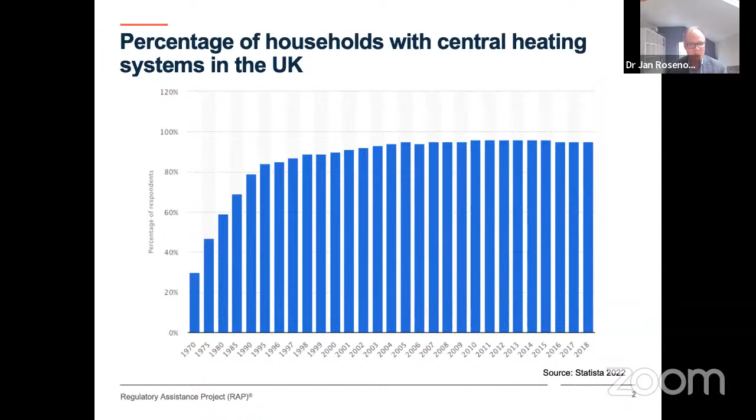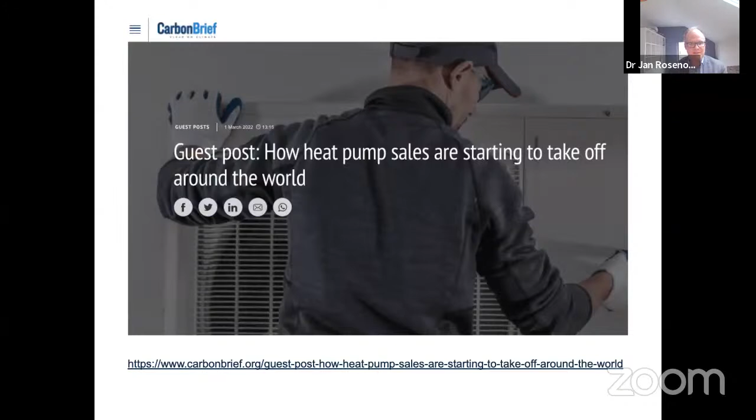Let me now go to the first of the three topics I wanted to talk about. Actually, there's a bit of an introduction about the global heat pump market developments we've recently seen before I come to that. This is based on analysis I've done for Carbon Brief recently with Duncan Gibb from REN21. We looked at the most recent data on market developments for heat pumps all over the world and selected a number of countries. This is the post - you can see it online if you want to look it up and find all the data and sources. The key finding really is that over the last decade, heat pumps have grown quite a bit.

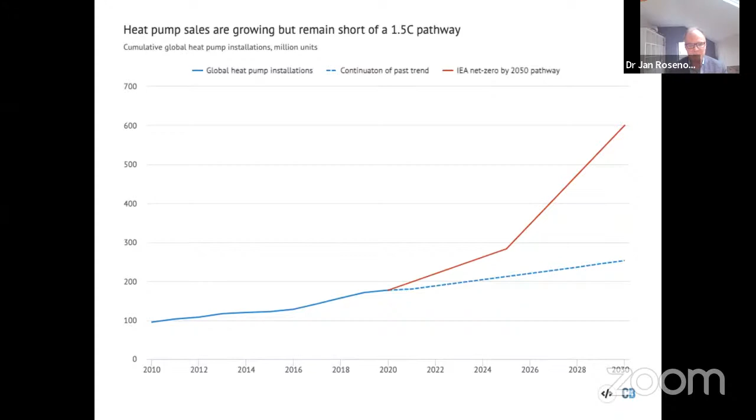The global heat pump stock has almost doubled. But if we project those growth trends to 2030 and compare that with what is needed according to the International Energy Agency to meet net zero by 2050 at global level, we are not quite there yet - we're not getting there. That is changing a bit now, because this graph was based on last year's data and didn't include all the data from 2021, so that is changing now.

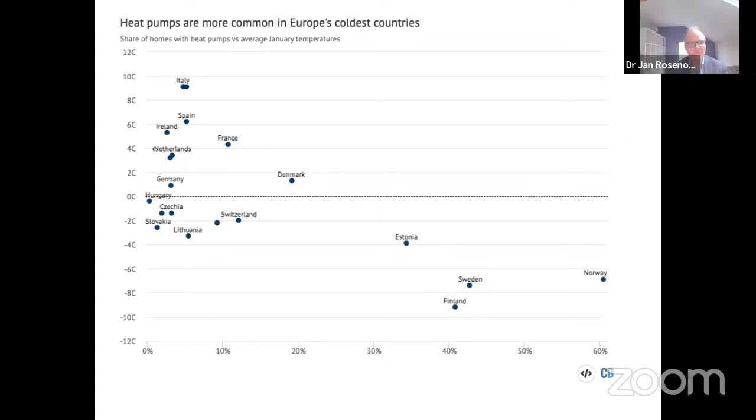The second observation is that growth in 2021 has been absolutely astonishing in a number of places. Poland, of all places, is showing the highest growth figures that we have found across the world. There are still countries publishing data as we speak, but this is the latest available data.

60% growth in the heat pump market in Poland in 2021, but also Germany 28%, Finland 25%, Norway 36%, Switzerland 20%, and the US 15%. All very impressive growth figures. We don't yet have the official figures for the UK, but I believe the heat pump market in the UK has about doubled. So again, very impressive growth figures there.

So now to my three topics. The first one that I wanted to tackle was what the war in Ukraine means for heat pumps. And this may not seem an obvious question, but it is.

It's really triggered a very significant discussion about the role of heat pumps to phase out Russian fossil fuel imports, especially Russian gas, but also oil, where we replace heating oil systems with heat pumps. There have even been proposals that the US government could use the Defense Production Act to mobilize funding, mass manufacture heat pumps and ship them to Europe.

So that's the kind of level of discussion that we're having. I'm having a call with the White House later to discuss that. So we really reached, I think, a different level now with the discussion about heat pumps really picking up a lot of steam. Just today, there's articles every day in the media now, but just today, two pieces that cite some of the analysis that we've done.

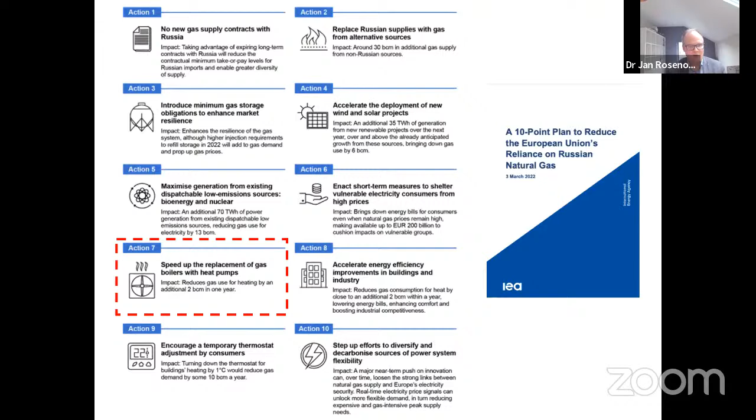And what the IEA believes should be done is to double the deployment rate as fast as we can to achieve savings in Russian gas. And of course, if you continue that beyond this year, those savings will be even larger. The European Commission have put forward a very similar plan as well that also involves a doubling of the deployment rate of heat pumps. How exactly they're going to achieve that remains to be seen, but the level of ambition is certainly rising quite rapidly because of those policy initiatives that we're seeing across the world.

I don't want to wait for policy developments. I actually want to do something right now with my own home. So that discussion has really changed, I think, the way heat pumps are being perceived, and they're certainly being recognized now at the very highest level of decision making.

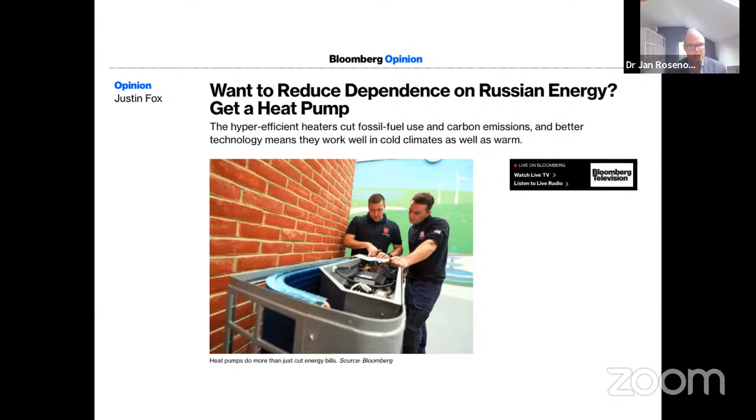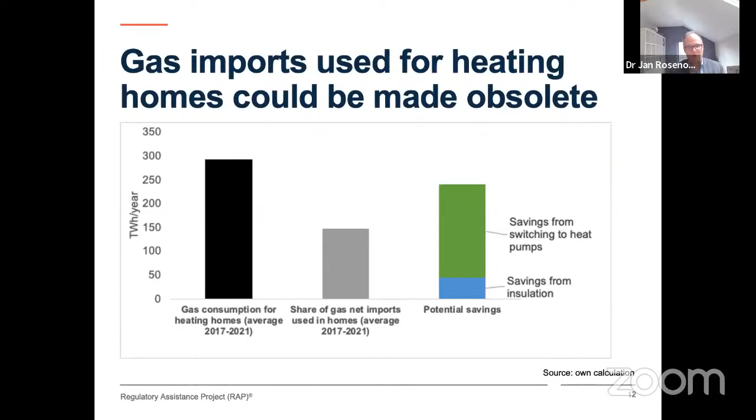And we can not completely, but almost offset the gas consumption. The reason for that is that some gas will still be needed, at least in the foreseeable future, for producing the electricity that is needed for the heat pumps. That's why the two figures don't entirely match up - that gap is essentially the electricity needed for the heat pumps to run using gas. But that's the opportunity we have, and I think that discussion will continue for some time.

Now, the second point I wanted to make is about energy prices. We've seen projections for next winter for dual fuel bills in the UK potentially going up to as much as £3,000 per household.

They're going to go up to about £2,000 in April, based on the Ofgem price cap. That's a huge increase in energy prices, especially gas prices, which have increased by a very significant margin. I think they're now about 7 pence per kilowatt hour after the price cap in April, and that's forecasted to go up even further. Given where we've been a few years back, when gas prices were around 2 or 3 pence per kilowatt hour, that has really changed the economics of heat pumps.

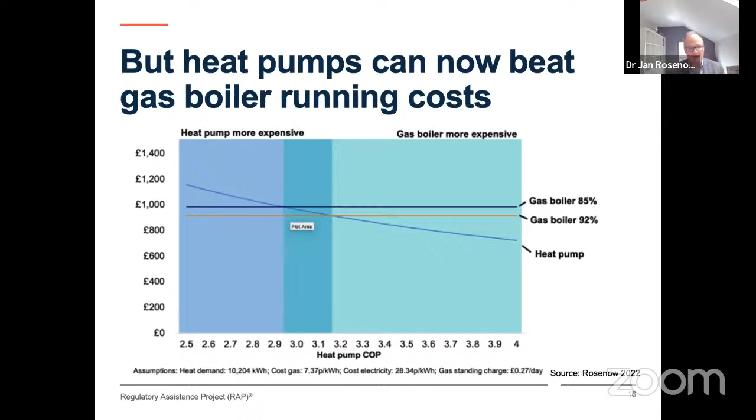Then you can see the sloping blue line going downwards — that's the running cost of heat pumps based on different coefficients of performance. I've considered 2.5 to 4 here; you could extend that further to 5 if you want. Around a coefficient of performance of 3, you're really starting to see savings come in. That will shift again next winter as the ratio of gas to electricity prices further changes and makes heat pumps more attractive. I think it's an important message that these price rises have really changed the running costs of heat pumps fundamentally, and there's now a situation where they can deliver real cost savings.

Now I wanted to talk a bit about net zero and what this means for heat pumps — that's the fourth and final part of my presentation. Net zero has really changed the discussion about home heating. Projections that are many years old now, based on a 60% or 80% reduction of carbon emissions, often still assumed a significant share of fossil fuel heating in homes, often because it's easier to reduce emissions in the power sector, and we could live with a remaining share of fossil fuel heating in homes and non-commercial buildings.

Net zero has, of course, changed that completely, because we now need to eliminate emissions from the building sector almost completely. Therefore, we see a much harder push in all the modeling that's been done, but also the policies, to ramp up low carbon heating solutions much more quickly.

Here's data from the IEA, the International Energy Agency. They published a roadmap to net zero by 2050 in May last year. According to the IEA, we will need 1.8 billion heat pumps globally by the year 2050. I think currently the stock of heat pumps globally is around 10% of that, maybe a little more, so we need to increase that by a factor of 10, which is absolutely massive. You can also see how this compares to some of the other technologies the IEA believe will play an important role here.

District heat, and of course some of that heat will also be produced by large-scale heat pumps, which are already used in places like Denmark or Sweden, but also some biomass, solar thermal, and a tiny slice of hydrogen. This is about 2% of total global heat demand for space heating which the IEA believes will come from hydrogen heating systems.

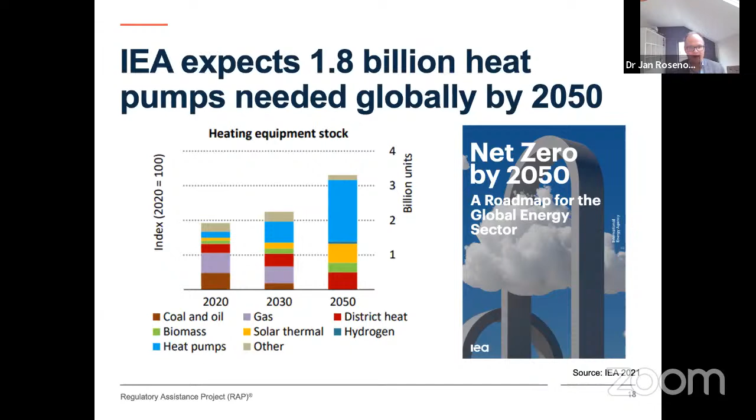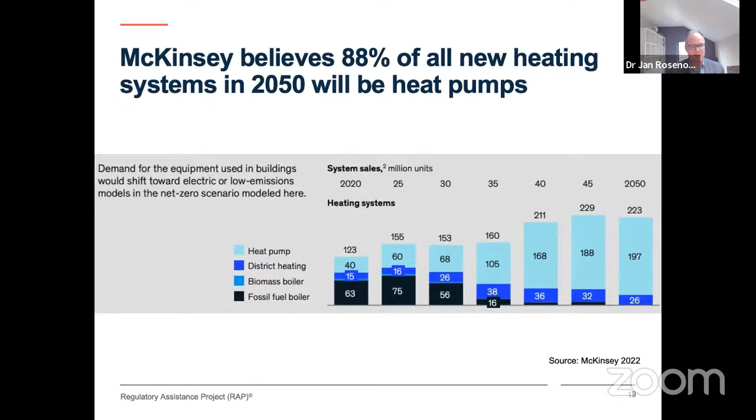Similar analysis by McKinsey shows very similar numbers, slightly different. In light blue here, this is the system sales, the number of units sold in millions per year over time. You can see in 2050, the vast majority, almost 90% of all new heating systems sold, McKinsey believe, will need to be heat pumps. So different analysis comes to a very similar conclusion: a massive rollout of heat pumps will be required to meet those demanding net zero goals.